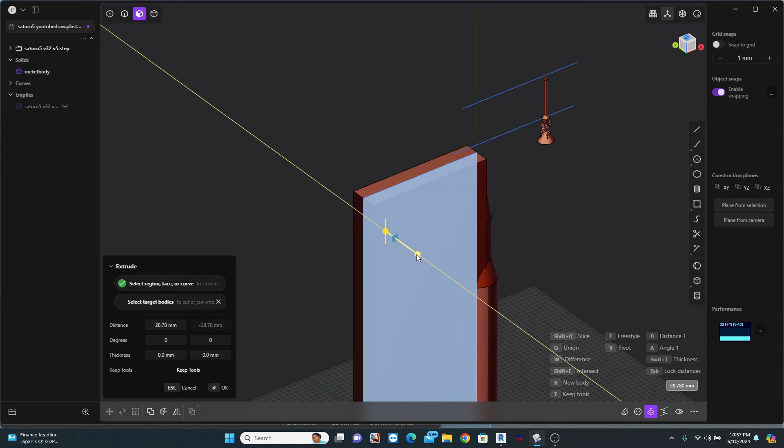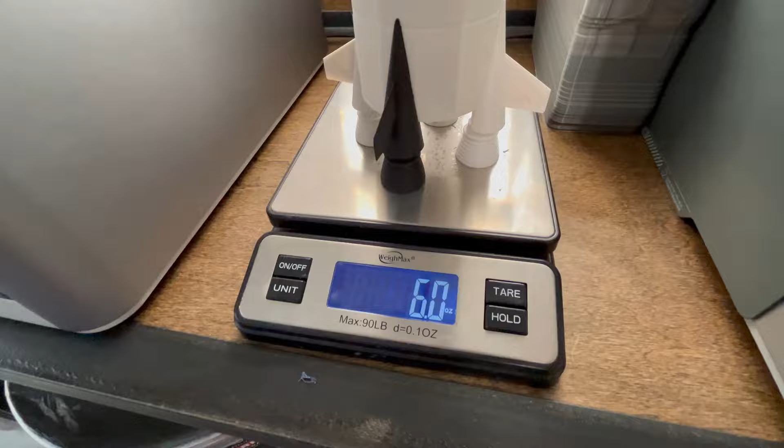In this design, I'm going to cover some design rules that I will follow to make this thing print very cleanly on the 3D printer. As I mentioned, I'll also be using a filament called lightweight PLA. This is a foaming style filament that produces incredibly lightweight parts, but it introduces some additional design challenges that we need to plan for in the design of the model. So I'll address these aspects while working through this rocket.

These rules also translate to the design of any flying lightweight PLA printed model. To start with, we need to find as accurate a schematic image of our model as possible. A quick Google search landed some photos that I can use as a background image to sketch from.

From here, I need to decide how big I want to make this rocket. Really, you could scale it to any size that you wanted, but since we will be 3D printing this, there will be some very close tolerances between how parts fit together. So we want to design it to the actual scale that we intend to print it out.

Also, one of the design solutions to make this rocket not burn up is that I'm going to introduce a paper core down the center of the model. That adds additional rigidity, and also a buffer from the ejection charge heat that pushes the parachute out.

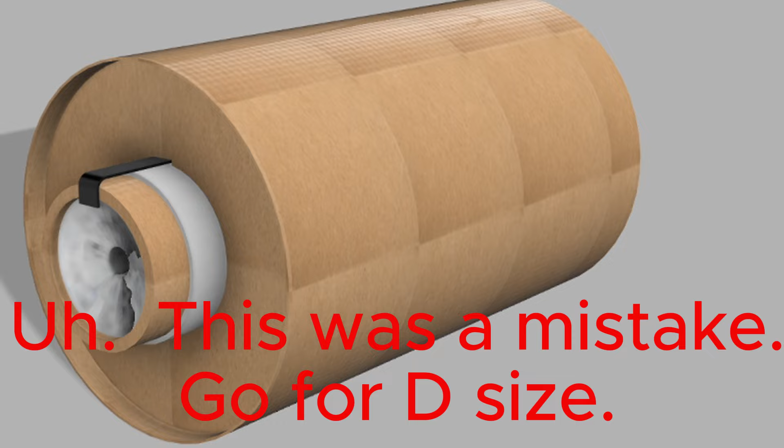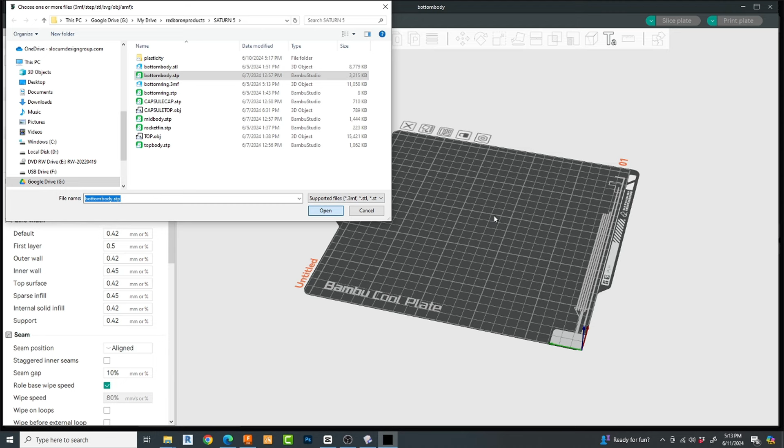This assembly will be bonded inside of those tubes, providing yet additional spacing to prevent heat from damaging the rocket body. We'll get to that later, but dimensionally what I've arrived at for this model was 33.86 inches in length. In the software you can design in any units you want, but it seems far simpler for the 3D printing process to simply work in millimeters, so there's no confusion with slicers and scale values, and that's what I'll do here. Therefore my conversion to millimeters makes this rocket 860 millimeters.

Now here's how you scale your image to that value. First off, I'm going to be in object selection mode, so that's keystroke 4. I can highlight my empty, come down to the bottom, and hit the G command for move, then very specifically the V command to set my axis right here. Now that I have that set, I'm going to drag this down to my red reference line, or origin point. We'll leave it there for now.

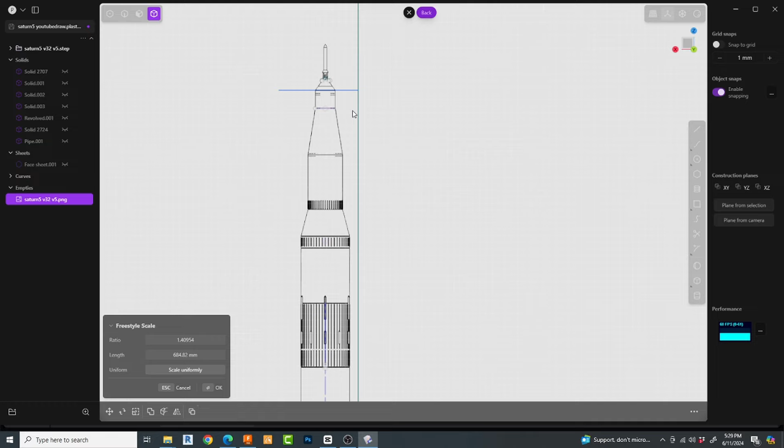Now I'm going to hit S for scale, then F for freestyle, and come down here and select scale uniformly -- make sure that's on. Now I can touch my reference line, come up to my reference point that I wanted, which was right here at the bottom of the capsule. Now as I drag up, the image scales uniformly to my second reference line. Now right click. Lastly, I want to make sure this is centered on my Z axis here.

So I'm going to highlight my image again, zoom in close to this image, say G again, and now V, and I'm going to pick right in the middle of that fin to represent the closest thing I can get to the center of this image. Then I can move it over, and as I come close to the green, my Z axis, if I hold my control key down, it will allow me to snap to it.

Now that we're here, it's time to sketch. You'll see right here on the right hand side this group of tools -- they are for sketching. We can create lines, we can create curves, we can create circles, but funny thing in this software, they're all called curves. I explain why in another video. Nevertheless, clearly the one on top is the line tool, and that's the one we'll be using most. So I'm going to force myself to the view that had my sketch model, and you can see that my plane is showing right here up on the top.

I'll use the sketch tool. By the way, shortcut is Shift-A, and I'll begin to sketch this all the way to the bottom. I'll worry about the separate sketch parts in just a little bit. I want to deal with the main body for now.

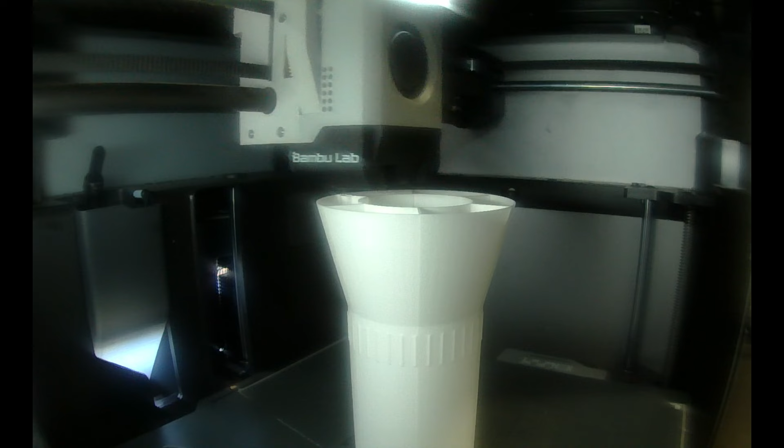And even though I intend to print this in vase mode on a 3D printer, one that creates a single wall print, I actually want this to be a solid body, and I'll explain why this is best later in the video. To convert your sheet to a solid body, we need to close all sides and make it watertight, so to speak. So in this case, I can simply do this by highlighting the sheet, touch on my sheet, and on the lower right icon here, I have an option to patch holes. Now I have a solid body.

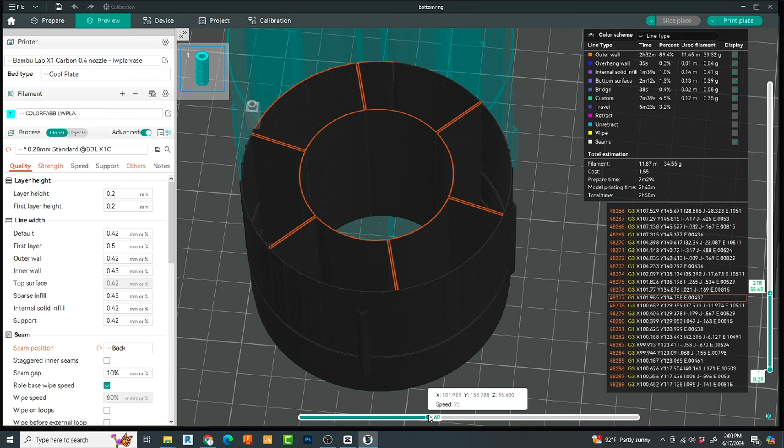The reason that I want to work with solid bodies is really twofold, but the first reason is that we're about to add a good bit of surface detail to this body, and we're going to merge those bodies together. Since they are solids, I don't have to worry about cleaning up all sorts of interfering sheets and geometry inside the model. The second reason is how we will print it later. We're going to trick the slicer in using vase mode to think that it's only slicing the exterior when in fact it's going to create all the interior ribbing we want in a single pass with no retractions.

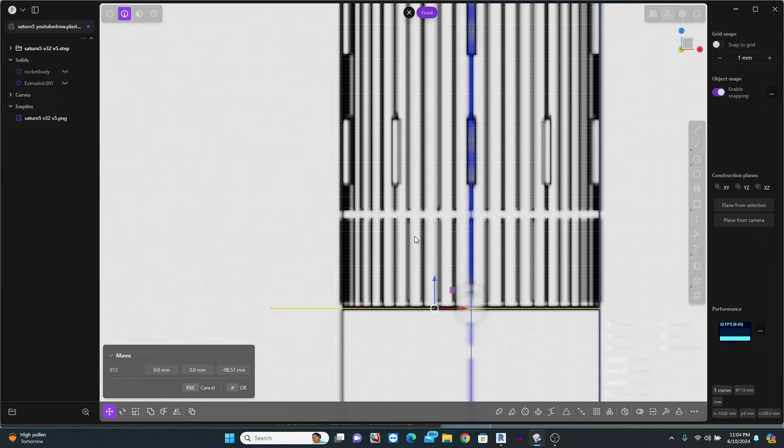I'm now going back to the sketch and I'm creating horizontal lines at key locations where we're going to add a torus actually and subtract that torus from the main body to create a circular indentation in the model. This is going to be important to do now because the ribbing that we make in a minute will have to be properly spaced inside of all of these components, otherwise it will just cut straight through it.

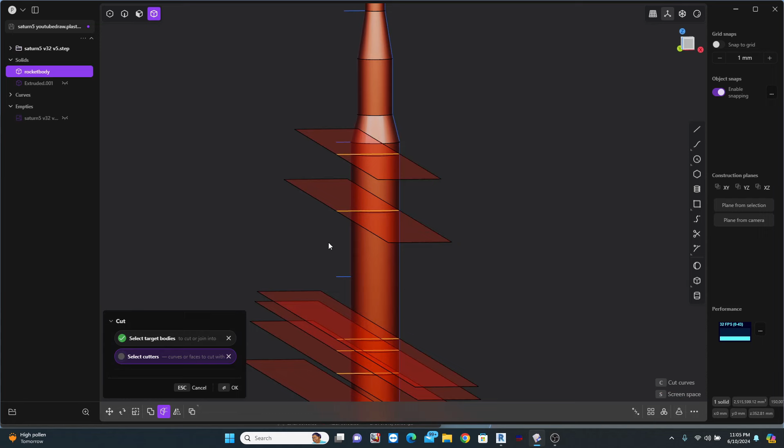So now that the lines are drawn, I'm simply going to use the Cut tool, highlight the model, and then highlight each of those lines, and those red marks are going to be where it slashes all the way through the model. Now eventually we'll put this all back together. What I'm doing here is actually highlighting the edges of each of these spots so that I have basically rings, and I'm going to use the Duplicate tool and then right click so that they duplicate. I also Boolean unioned all of the pieces back together before the next step.

I have a ring around each of these pieces. I'm going to highlight it and I'm going to use the Pipe tool. So I set that up, and now we can use Boolean operation to subtract the pipes from the main body.

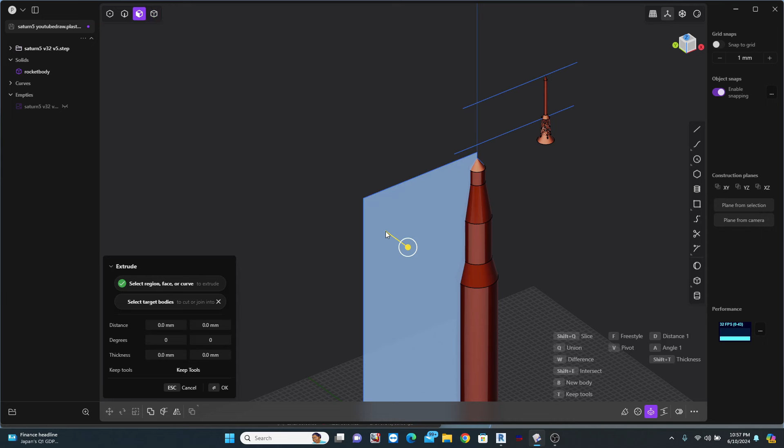I'm now going to create a rectangle all the way down the length of the rocket tube, and then I'm going to extrude it, and I'm hitting tab so that it extrudes equally on both sides. And then we're going to come down to the distance, and this is important, 0.18 on both of these values. And then when we right click on this, boom, we have a solid. What we're going to do now is use the Boolean operation to create an intersection, and we have a profile.

Now with face mode selected, I'm going to select each of these edges all the way up the side, and you see how the rings cut out of it. And I don't want this to go all the way to the outside edge of the rocket body. We need to have a little relief. So we're going to bring this back in by 0.4 millimeters.

Now I'm going to use the array tool. I'm going to array this profile, or the solid body, in a circular fashion from the center axis all the way around the model, and I want to put it in about 6 places. I now use a Boolean operation to union these all together, and then the very tip I don't need, so I'm going to create a rectangle here and Boolean subtract that.

At this stage, we're going to turn the rocket back on, and we're going to Boolean subtract the interior from the main rocket body, so that we have these voids in the interior of the rocket body. Never mind all the additional detail on this. I later decided that it was better to do this process first, and then we'll get into the additional detail on the rails on the outside.

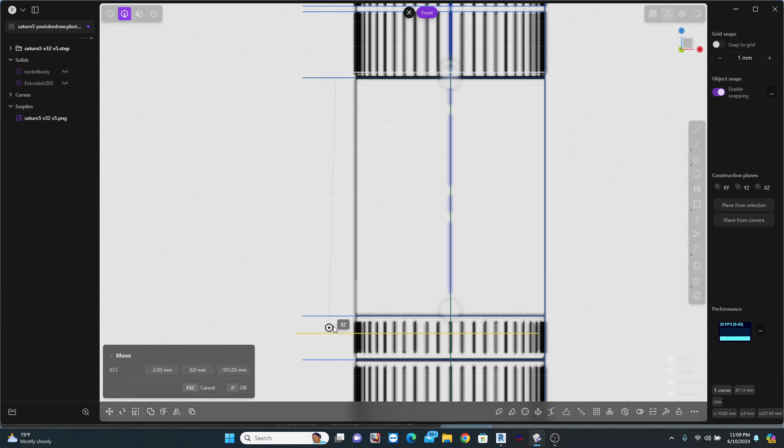Going back to my sketch now, I'm marking the tops and the bottoms of this structural ribbing so that we can use that in just one moment. Taking the edge profile line now, I will make sure that all of the horizontal lines intersect, and I'll simply use the trim tool to cut away so that I have the exact length of the segments that I want to use. Now I'm going to highlight each of those segments. When I have them highlighted, I'm going to use the pipe tool again and give it a section size of 0.7 millimeters.

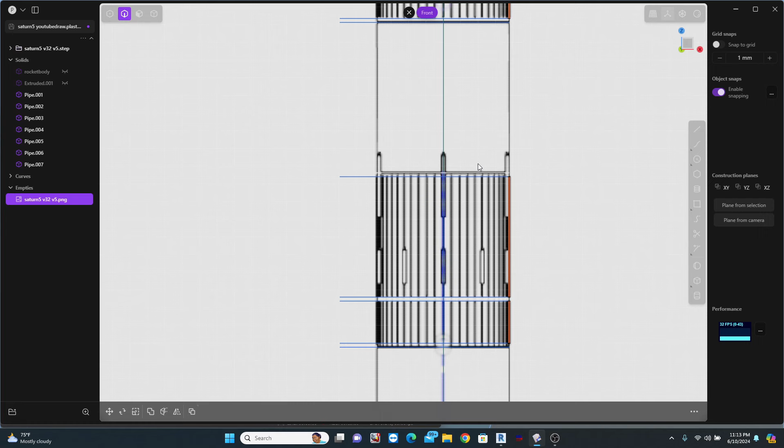I'll go back to the sketch now, and I'm going to mark the location of these more pronounced triangular, looks like joiner bars. And we will do the same process again, not with the pipe tool, but with a rectangle. Well, actually what I'm going to use is the cube tool, and I'm going to tab to strike from center. And I made this 2 millimeters by 2 millimeters. And now I'm going to pull it down to the extents of the line segments that I had made.

And then I am chamfering up and then deleting the top cap to make the point. I didn't want exactly a 45 degrees, so I'm actually scaling in the Z direction here to make the point a little bit longer. I'm sure there's other ways to do this. Then I'm simply going to cut it, and then I'll move into position where I want it. Do the same with the bottom, and then we'll Boolean union this all back together to create an entity exactly the length that I wanted.

Now it's time to make duplicates of this at each of the segments. So you'll see me bringing it up here, and the segments are of different lengths. So we'll have to do the same thing here. We're going to, in this instance, grab all the faces and then just move with the G command, move it down. And now I'm going to rotate all of these bodies exactly 45 degrees on their axis. Then with the inside faces, I'm going to select them, and I'm going to arbitrarily move them to exaggerate them into the body of the craft.

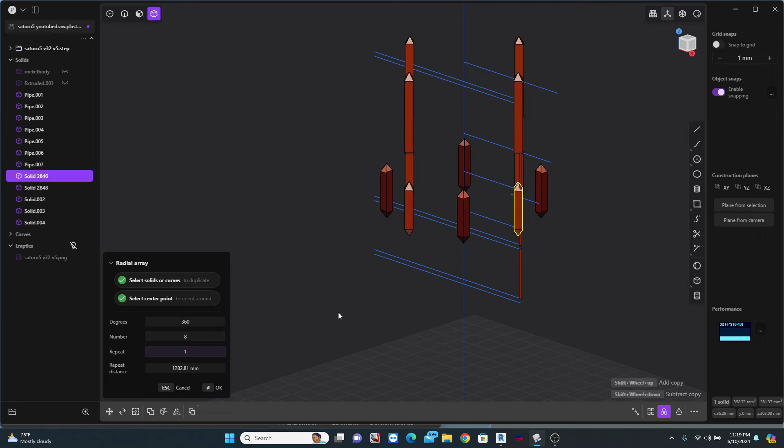And now we can array these. So I'm going to select them all again. I'm going to hit F, search for array, and then type in a number of 40. And then we can Boolean union these all to the original body. And we have a clean, singular, solid body now.

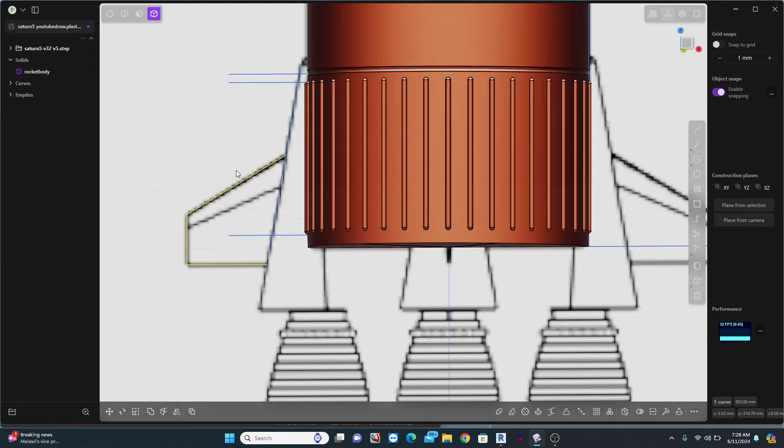Here you're going to see me tracing out the actual rocket or the motor body and the fin. So I'm drawing a length at the bottom, and then I'm going to use the array tool to bring those all up so that they're even spacing. Now this one at the top had a little bit of a curvature on it, so I'm putting a half circle on it, and then you'll see me adding the stepping going down here, and it's a bit tedious, but then I go and trim it all out and create a single profile, then join it together.

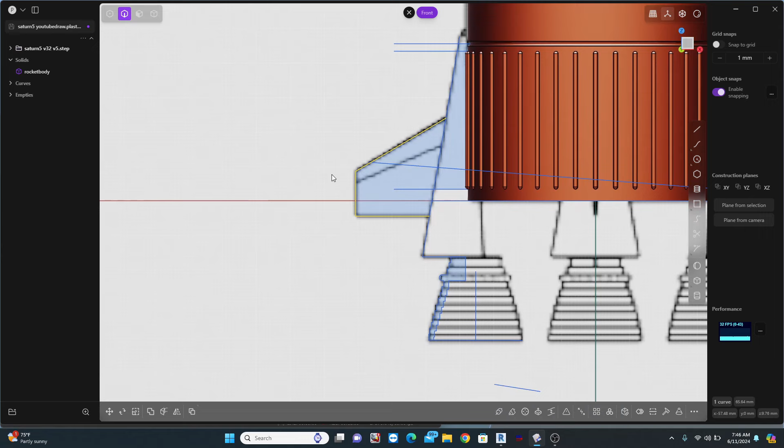Now I make a duplication of it, bring it to the inside of the wall, and create a solid profile or a joined profile. So again, I'm going to find the midpoint of this, and we'll use that in a minute for revolving these profiles around an axis point. So I'm going to finish drawing out the shell and then the little fin area, and then we're going to use the revolve tool and flip it around that vertical axis we made.

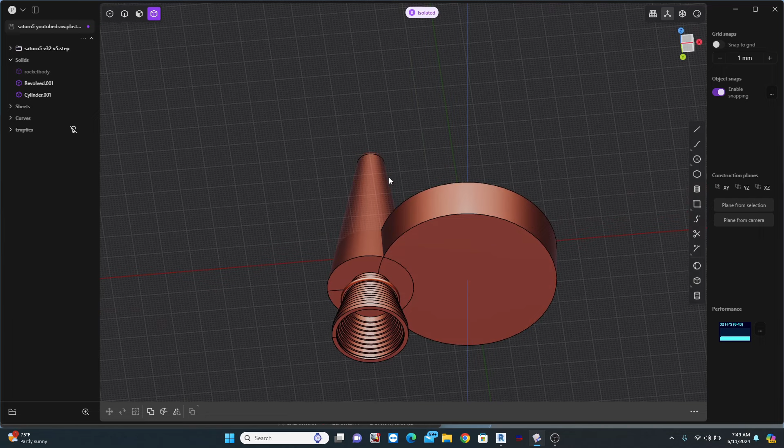I'm also going to do this with the shroud on top. I'm going to create a circular body here, and I'm going to want to subtract it from the shroud. But I'll find out that the shroud is a sheet, not a solid. So what I'm going to do is go to the top of it, and I'm going to use the patch tool to put a curve on the top of this thing. Now, after I fix a little bit on the bottom, I can use a Boolean subtract feature right there to remove it.

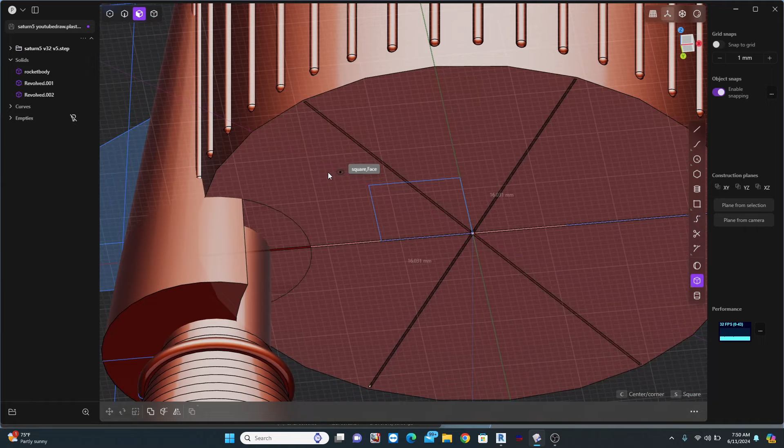So doing a little cleanup here, and then you're going to see me just pull that cylinder up to make this part stronger. And then we're going to do some more Boolean subtraction. I'm going to make another cylinder here to replicate the size of the whole rocket body. And then I'm isolating those with a period key.

I'm going to pull that up and then Boolean subtract from the shroud as well. That way I didn't have all of this geometry from those little ribbing inside of it. Here I'm just extending the top portion of it, and then I'm going to union it back together. So we're in good shape.

Now it's time to make the fin. I'm going to create a rectangle just kind of as a plane to work from and decide what size I want, and then using a curve, outline a rough shape of my airfoil. Now I'm duplicating it to the back side, and I'm going to freestyle scale it so that it moves all the way to the top, and then we can do a loft.

I'm lofting the bottom of this, and then when I join them I can patch the sides. And then now I'm going to extend that into the main shroud body, and then we're going to union it all together. And now we have a solid piece. And you see me using a circular array tool here to wrap these around the rocket body.

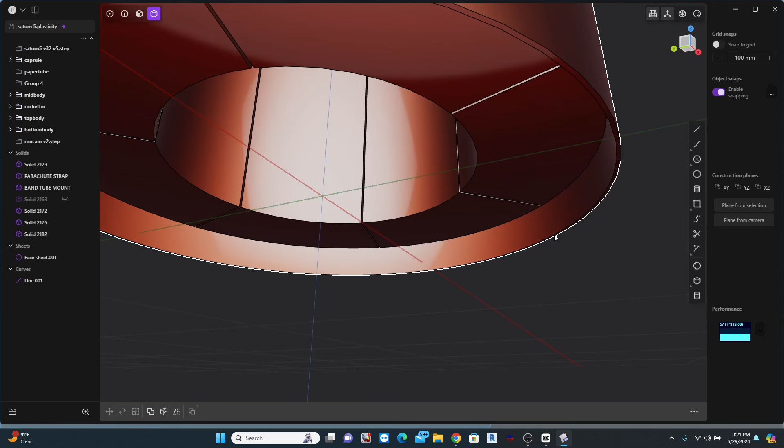Then, when I turn on my upper stage piece, there would have been a line here for the other one that we had duplicated, and we're going to Boolean union those two together, and then we would simply Boolean subtract the lower stage from the upper stage. And when I do that, I get this nice interior lip here so that we can interlock these parts.

Now, the hole in the center. You're going to want to measure the diameter of your towel holder or tube, whatever you choose to use, and simply run an extrusion straight through the middle of your rocket and then Boolean subtract to get that part done.

Top tower. Well, this part right here looks like an upside down golf tee. That was simply a revolution, just like we did, of the main body. And then these seem fairly difficult, but they're really not. I'll show you right here. I'm going to draw a vertical axis, and then I'm going to draw a tapering curve.

And now I'm going to go into this view here, I'm going to do a radial array, touch the center of my axis, and I'm going to tell it 4. And now when I right click, I have these 4 points. But what I'm going to have to also do is, now that that is done, come up here and rotate them 45 degrees.

Now, in key areas like these cross support bars, I am going to draw a horizontal axis, and using a cut key twice, now I have literally cut all of these. So it's a simple matter of snapping to the endpoints to create my horizontal pieces. And now if I do this at the bottom, it's very simple to draw in your diagonal supports as you see fit to use them.

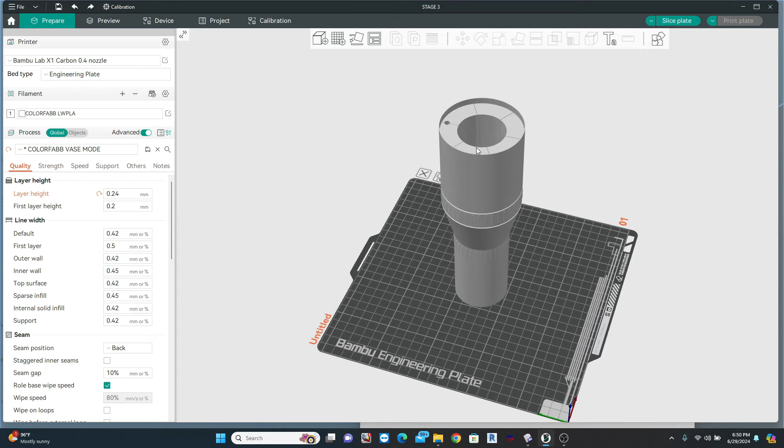Well, guys, if you're still with me, you guys are rock stars. This has been about 25 minutes. So we're going to stop here, and I will upload the next section of this video, and we're going to cover printing, we're going to cover assembling, and of course we'll cover flying.